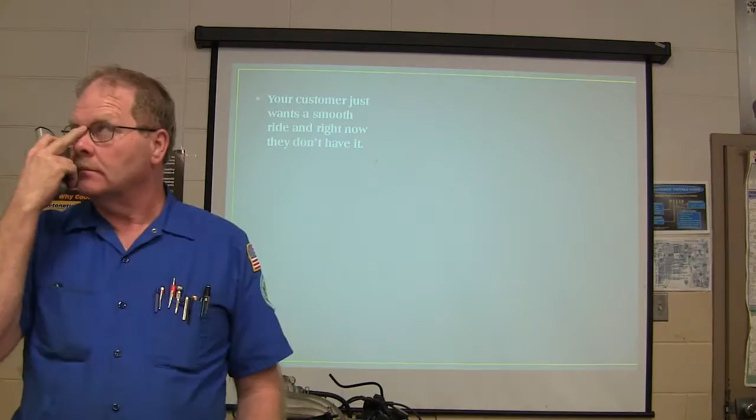So the customer wants a smooth ride, and right now they don't have it. Whenever we were working on the Buick, the president's car out there earlier, me and Reeves drove it up the road, and we hit about 60 miles an hour, and we were getting a little bit of that jiggling, feeling it in the seat of the car.

It had the tires balanced somewhere else, but anyway we put it up on the machine, and some of those tires had 2.5 ounces on them, or whatever. Sticky weights? One and three-quarter. Yeah, and what was crazy too, he also had originally set it up with a cone that looked like it would work right, but it didn't, and they were egging. So you had to make sure that whenever you're spinning that tire, you look at it.

Anyway, simple fact is, if you look under there, have you ever looked and seen wires going to the shocks and struts? And you wonder, what do I do with that? If there's some kind of a problem with that kind of thing, I even wonder how they work.

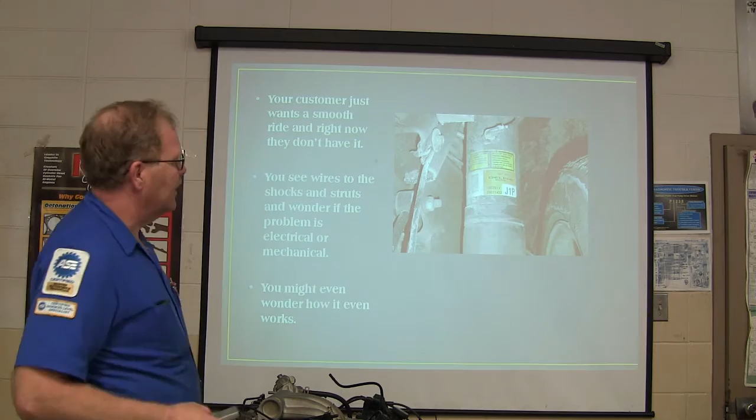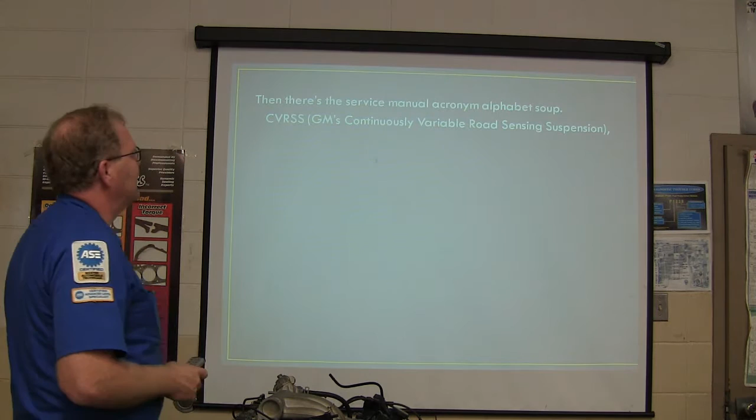Well, this is Delphi. Now Dave, the guy I was talking about earlier, he works for Delphi. He's one of their engineers, a guy I happen to have met in my doings and whatnot. The service manual has got that acronym alphabet soup - CVRSS, GM's continuously variable road sensing suspension.

Basically, you can see how simple that is, right? Fairly simple, you can just glance at that and figure out how it all works, not a problem. Is that them shocks you told us about, that somehow they put current to them and it makes the... Yeah, we talk about that a little bit later in this presentation. But they basically got some ferrous metal stuff in oil, and whenever you charge it up, it gets real tight and hard and turns into something stiff.

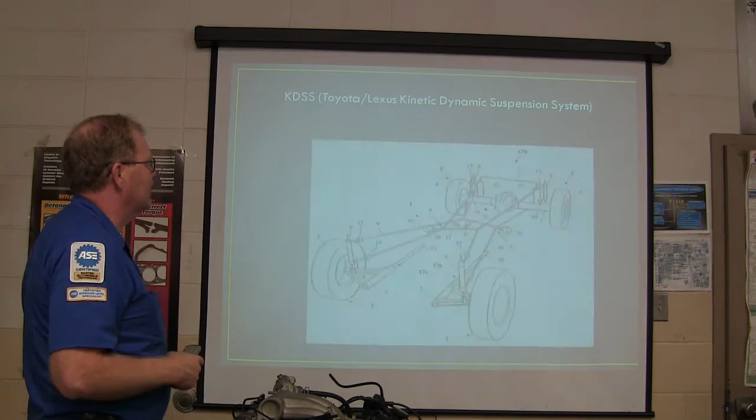It's pretty cool stuff. And then you got this KDSS, which is Toyota Lexus Kinetic Dynamic Suspension System - everybody's wanting to come up with that. There's sort of a rundown on that, if you want to look at all those numbers and everything, you can see what's going on there. It's a nice little tangled web we're in here.

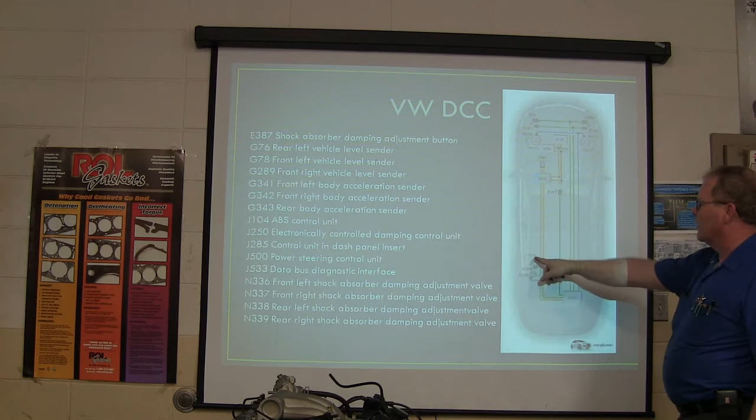Now you might notice on some of these German cars, each one of these components has got a code number like that. Whenever you see it on your schematic, it'll do that. You might notice over here, they got N338, G343, G76, and all of these things line up with one of those deals right there. So whenever you're troubleshooting something, if you don't know where to find this stuff, that's when you got issues.

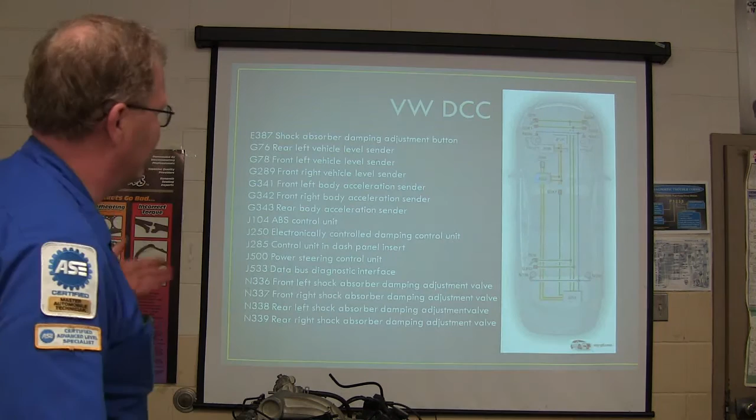See there your J533, N336 - if that was a clearer picture, you could see those numbers. That's what it's going to look like in the shop manual when you're looking at that. That's the peculiarity of that German stuff, they've got that way of doing that. BMW and Volkswagen are similar in a lot of the way that they do things.

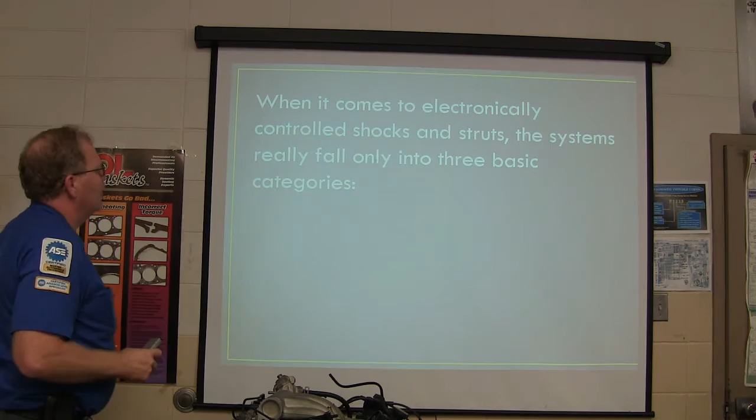But electronically controlled shocks and struts, the systems fall into three basic categories. You got manually selectable suspension, where you can change it yourself, and you've got your semi-adaptive suspension, and then you got your fully adaptive suspension. We'll try to touch on some of this stuff - you need to have some exposure to this stuff anyway.

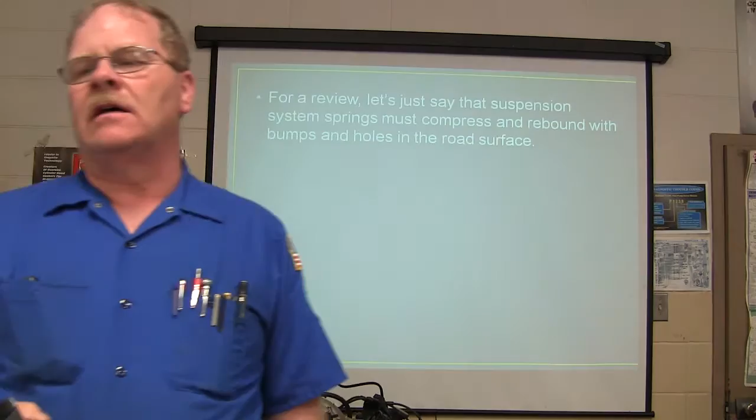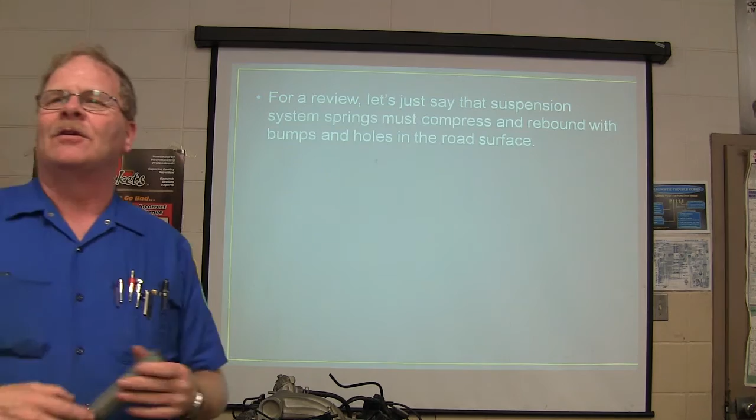Suspension system springs have to compress and rebound with bumps and holes in the road surface. Back when they had wagons, they just had axles under there, and every time you bounced over a bump, it would compress your back a little bit. It really hurt. So they'd either put rawhide under there to make that not so bad, or they'd put springs on the seats. That's the reason why they started doing that.

The softness or firmness of the spring is known as the spring rate.

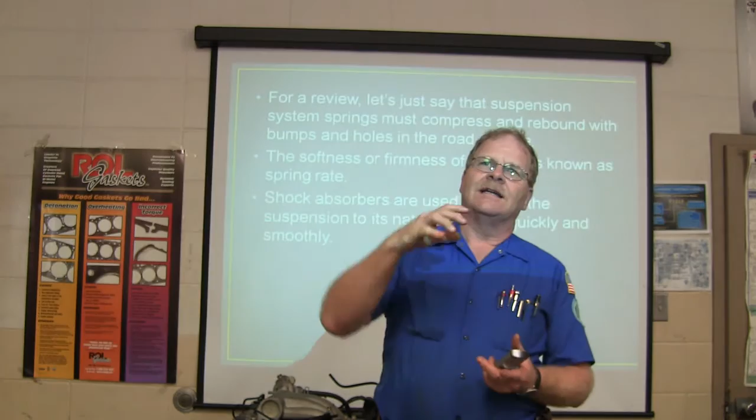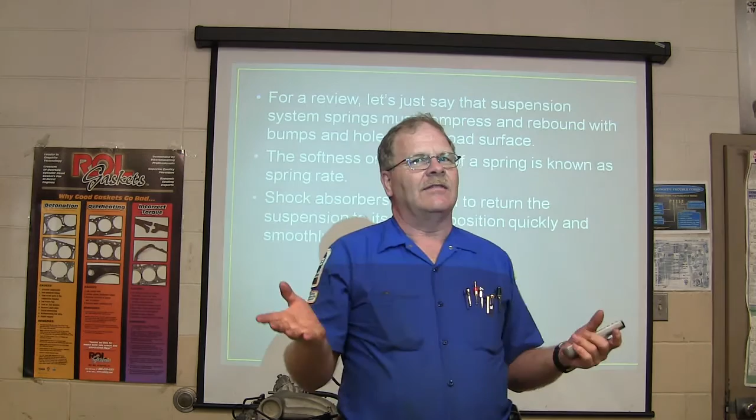My dad had a 66 Chevrolet pickup truck. It was a 3/4 ton, and the springs were set up under it. It had coil springs, not leaf springs, and half of the coil spring was wound really tight with the coils close together, and the other half was wound with the coils farther apart to try to give you the best of both worlds. It could carry a heavy load, but at the same time it rode fairly decent. So they had the same spring with two different spring rates on it.

But if you loaded it down, those were by default like overloads, because if it squished the spring all the way down so the coils were all touching one another, that was as far as the truck was gonna go.

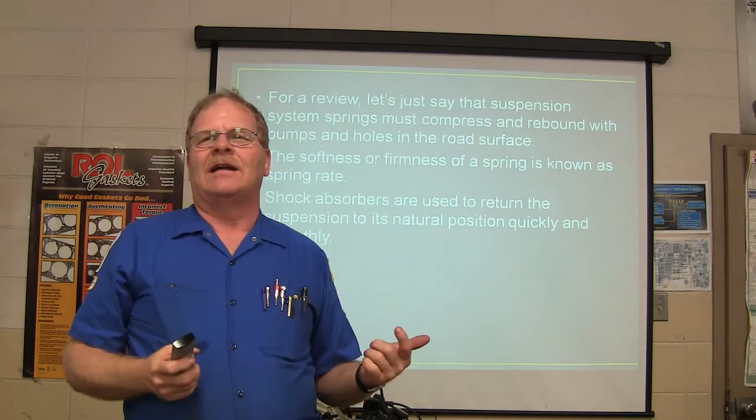I took it to the gravel pit one time and told them I wanted a yard of gravel put in it. It was a real long truck, and the guy says, there ain't no pickup will hold a yard of gravel. I said, well, put it in here until it runs over. And he put a yard of gravel in it, and I drove away with it.

He was really surprised. But anyway, shock absorbers return it to its natural position quickly and smoothly without bouncing.

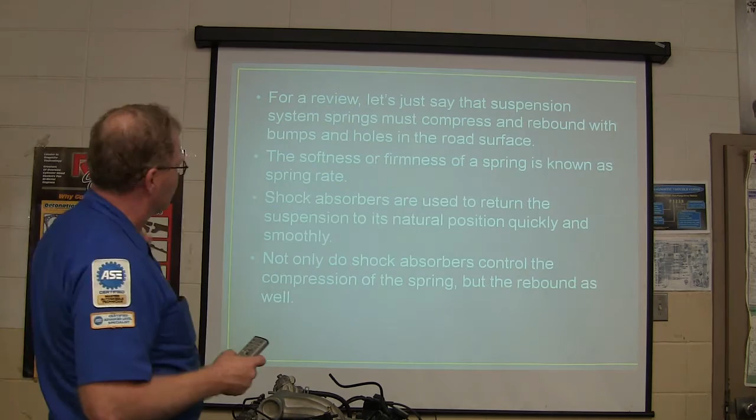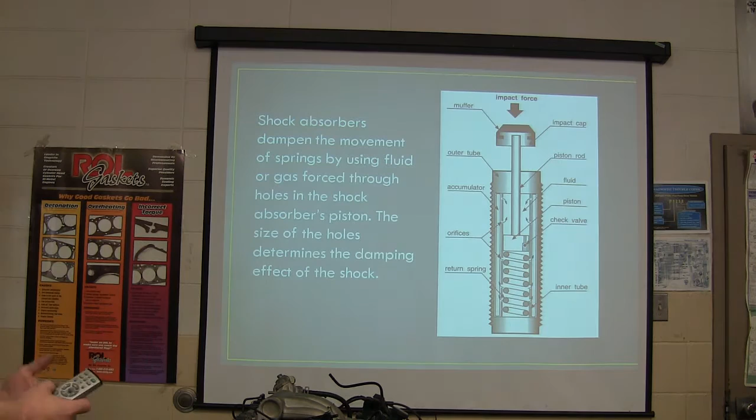Not only do shock absorbers control the compression of the spring, but they dampen the rebound too. They use fluid or gas forced through holes in the shock absorber's piston. The little holes here have these orifices, and you can see this thing bouncing in there.

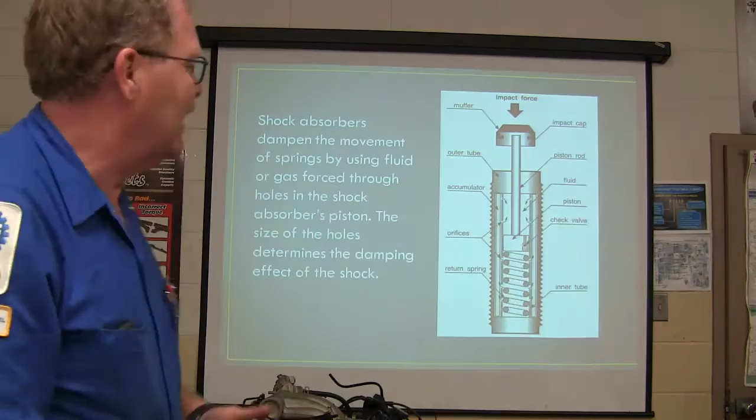Some of them are charged with nitrogen and that kind of stuff. How many of you guys have put shocks on that had that nylon thing on them, where you had to take that off and it would extend? That's irritating to have to deal with. Some of them don't have that. Some of them, when you take them out of the box, they're all the way compressed, and you put a wrench on the top and turn it like a quarter turn, and they come out. They don't all have that nylon stuff on them.

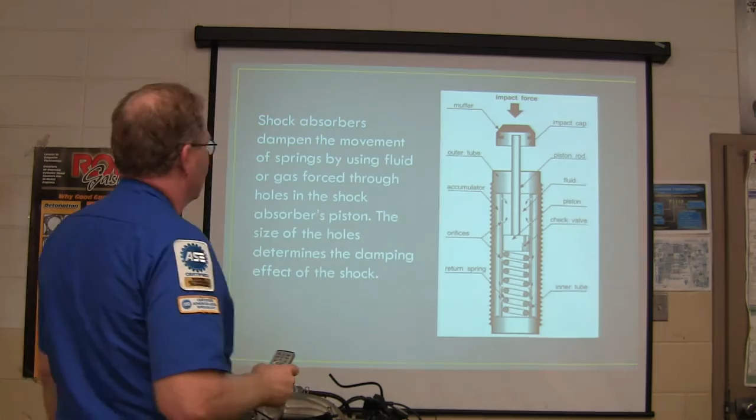The size of the holes determines the damping effect of the shock. If you change the size of the holes on the fly, you can change the firmness of it, right? That's probably what we're going into.

As a shock absorber compresses, the piston moves through the oil or hydraulic fluid, and the energy never goes away, it changes states. That's the first law of thermodynamics. The mechanical energy of the spring oscillations turns into heat energy, so they get good and hot.

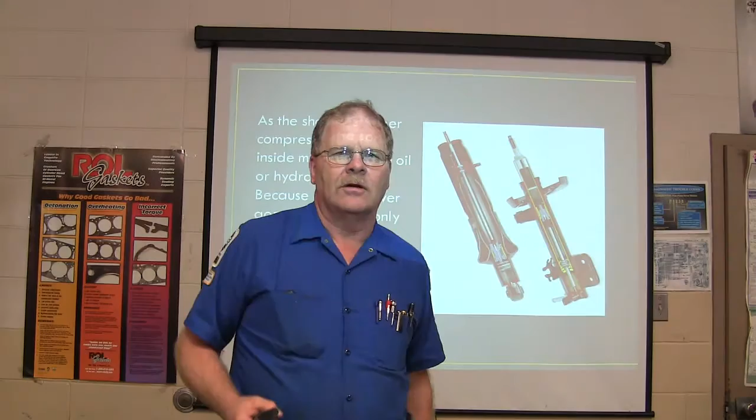Have you ever busted any shocks that were good shocks by going over something too hard? You did that? What'd you do to them? It doesn't surprise me. Drove through a ditch. I figured if anybody had done it, you had.

All right, the Rough Rider. Now listen to this, you might not ever know this. I looked for this and couldn't find it. But Dave was talking about something, apparently was out there earlier. There used to be an I-Suspend app for your iPhone.

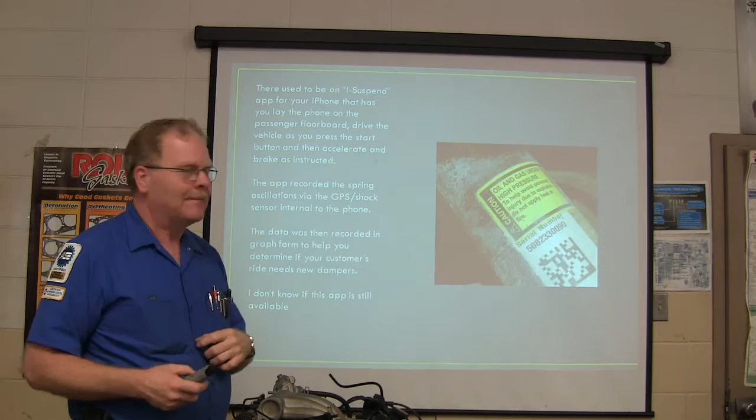You lay the phone on the passenger floorboard and drive the vehicle. As you press the start button and accelerate and brake as instructed, the app would record the spring oscillations via the GPS shock sensor internal to the phone.

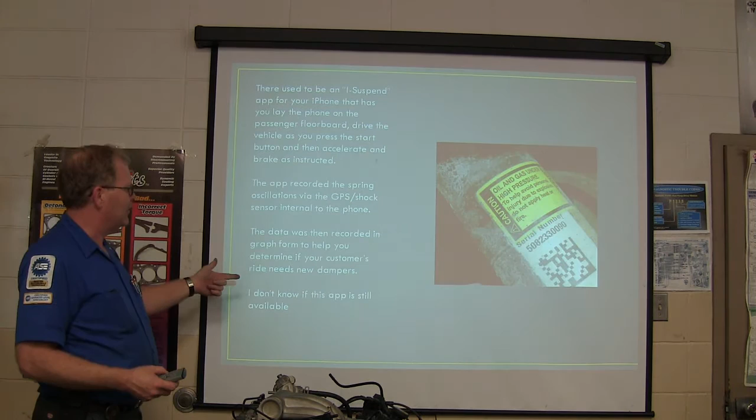The data was then recorded in a graph form to help determine if a customer's ride needed a new damper. In other words, it would make a graph about the shocks and how they were working. That's pretty cool. I went looking for that and couldn't find it, so if you can find it, great, more power to you.

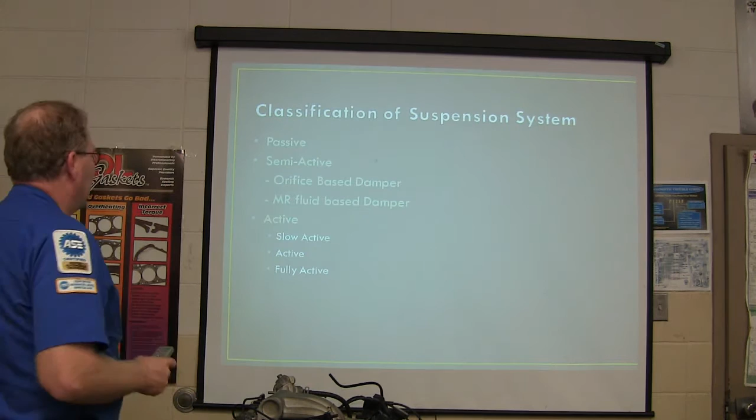I couldn't find it. All right, so passive, semi-active, and active suspension systems - that's what we're looking at next, the classification of suspension systems. You've got your passive, your semi-active with orifice-based damper or MR fluid-based damper, and then active, slow active, active, and fully active. There's a whole bunch of different nomenclature for that stuff, depends on how deep they want to go into it.

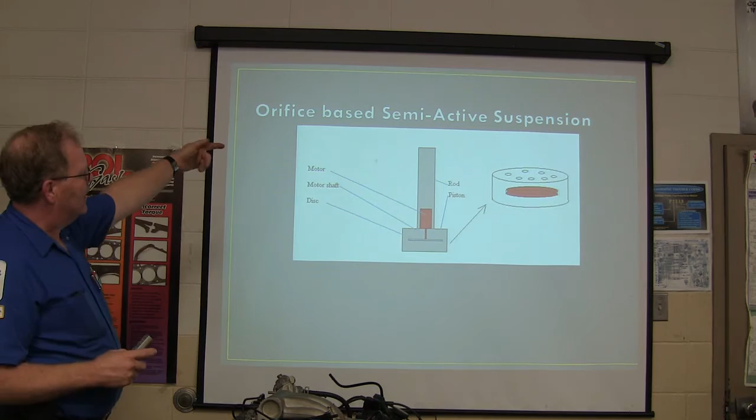Now your orifice-based semi-active suspension has a motor, a motor shaft, and a disc. This was drawn by somebody on paint, a public domain thing. Basically, when you turn that disc it changes the number of holes that are open, and that's how it changes the damping. That's basically like some of your old Continentals that had that kind of thing on there. On the very top it had a little flat deal with 4 wires going to it.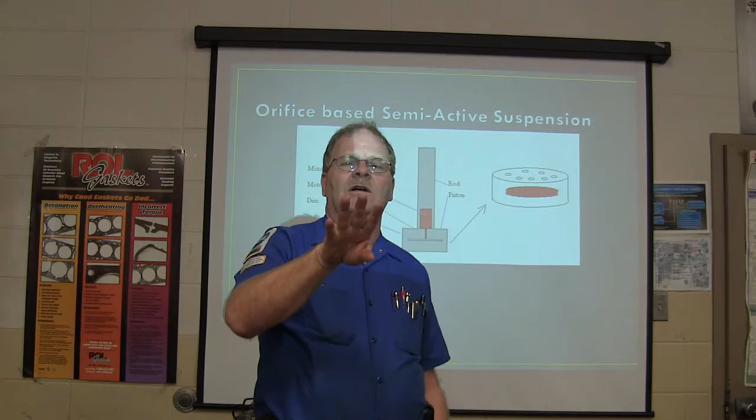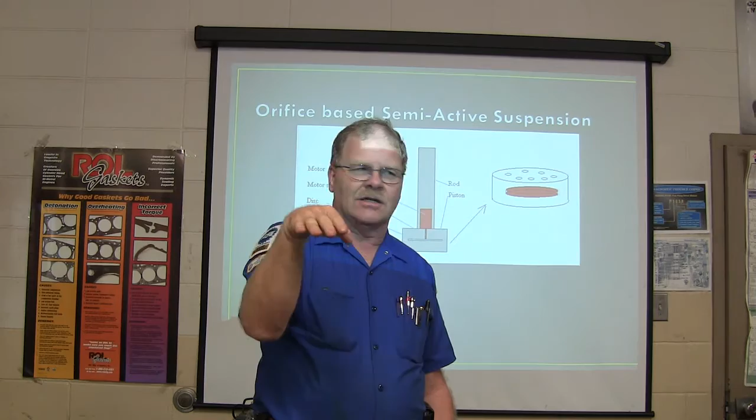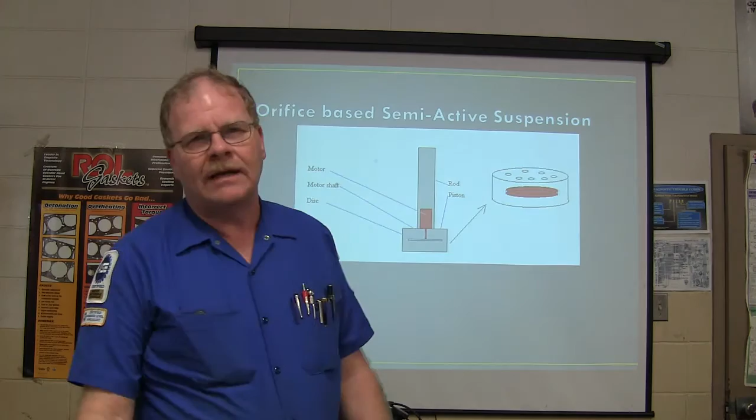2 of the wires, when you reverse polarity, would move it back and forth, hooked onto a little D-shaped shaft going down into the shock. It would only turn to 2 positions. There were 2 wires with a voltage coming in, and if it shorted that voltage away, it would know it was in one position. So basically you had a module looking to flip those back and forth. They went on with little Torx screws, and the ones in the back under the package tray on top of the shock towers were a pain to change. I did some of that stuff too, and that's another little picture of it.

Magnetorheological fluid is composed of oil and varying percentages of ferrous particles, 20 to 50 microns in diameter. What's a micron? Very small - you want an exact answer? Is it a millionth of an inch? It's a millionth of a meter, is what it is. It's like a thousandth of a millimeter, right?

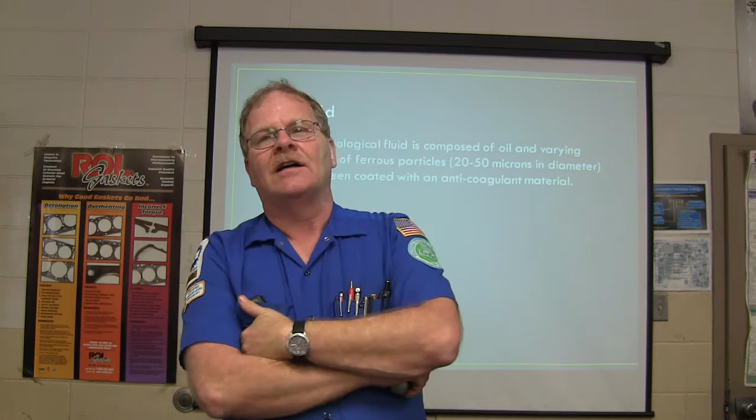So now, does everybody know what a micron is? When I ask at the end of the presentation what did you learn, are you going to be able to tell me that a micron is a millionth of a meter? Whenever you talk about a fuel filter, a 25 micron filter, they're basically measuring the gaps in the filter, which would be pretty fine, right? How do they measure that?

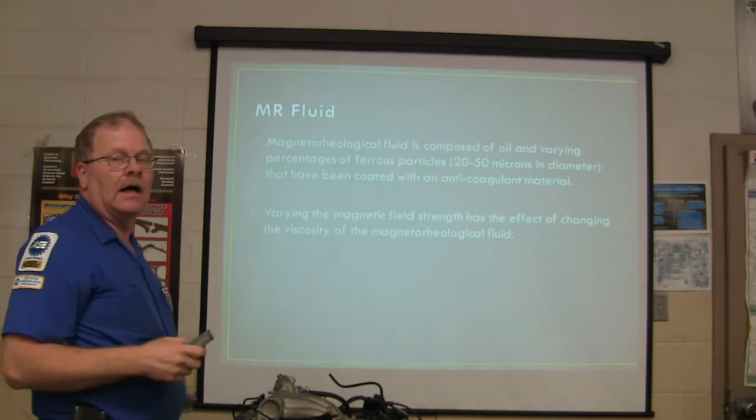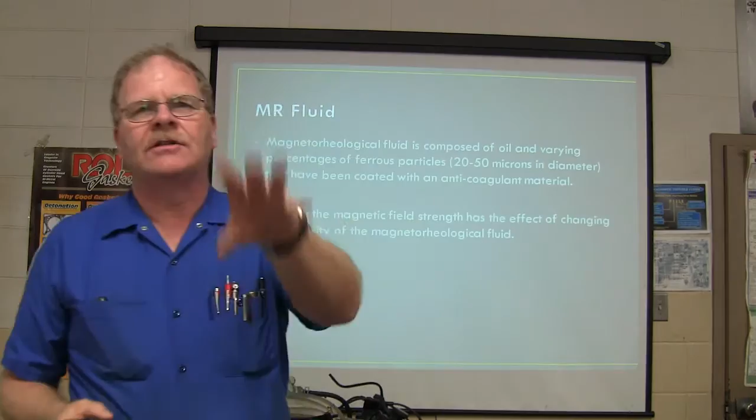How do they measure that? They've got little teeny tiny plastic balls that are that size, and they see how many will go through there and how fast. Each one, like a micron, is just a little sphere, looks like powder to you, but basically they determine how much will go through, and it's little enough to go through just about any kind of filter. As a matter of fact, steel, iron, rust is in such tiny particles that it will go through a fuel filter in some cases and stop up injectors. You've seen that happen before? Carburetors too, that little stuff.

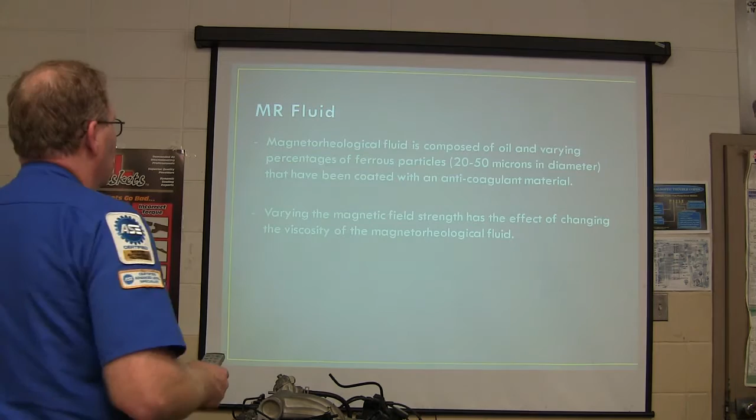So you vary the magnetic field strength and it has the effect of changing the viscosity of the fluid. You can see how that would work - it's not that complicated, right?

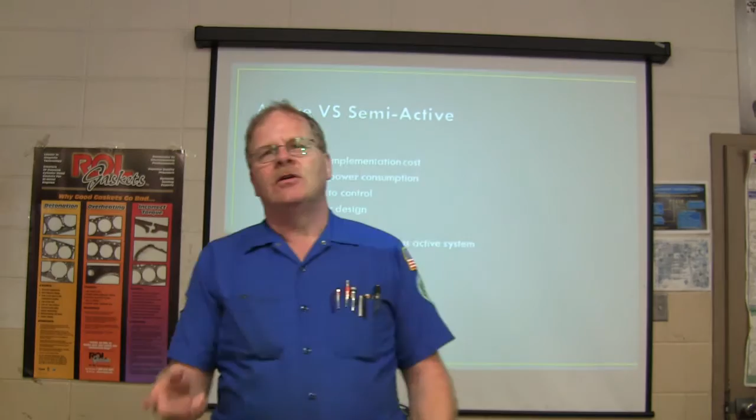All right, now then, active versus semi-active. You got lower implementation cost on semi-active, lower power consumption, doesn't take as much to keep it going, easier to control, simpler design, and it's easy to put on there if you're just going to put some on there. Can you imagine doing that? You put different shocks on there, they got little actuators on the shocks, you run your wires out there, and you can basically put some on there your own self.

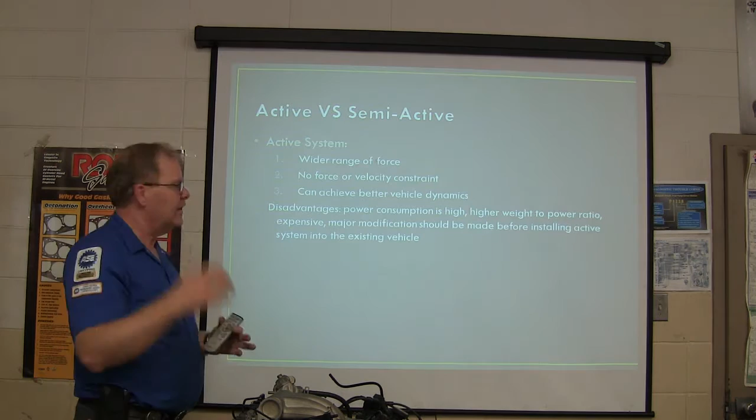All right, so active versus semi-active. The active system's got a wider range of force, that means it's got more that it can do. No force or velocity constraint. Can achieve better vehicle dynamics, and the disadvantages are it uses a lot of power, higher weight to power ratio, expensive. Major modification has to be done before you put an active system into the existing vehicle.

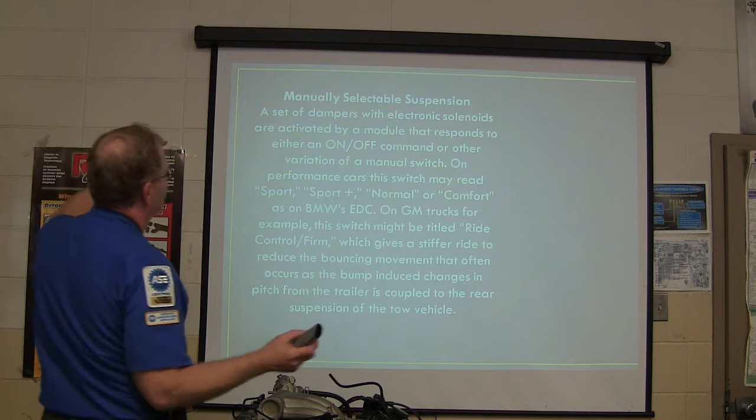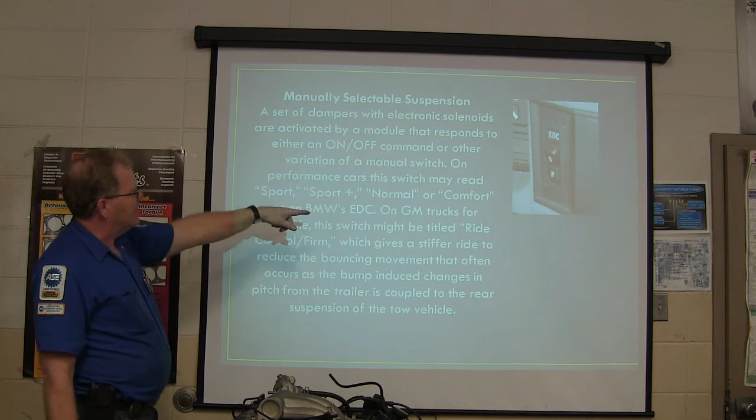And I never have been much of a mod person anyway. So you got manually selectable suspension. You got a set of dampers, electronic solenoids, that's like we were talking about earlier, responding to an on and off command. That's on your switch right there. BMW's EDC. On GM trucks, there's a switch that might be titled Ride Control Firm. Gives a stiffer ride to reduce the bouncing when you're pulling a trailer.

You ever drive a truck that had a really, really heavy load in the back, or a really heavy trailer behind it? And the headlights shine up in the trees, and it feels like the front tires are barely touching the road. You ever seen that? It just feels strange when you're driving something like that. You can turn the suspension up, it helps you with that kind of thing.

All right, so your major components of an electronically controlled semi-adaptive system are body position sensors, steering position, and body acceleration sensors.

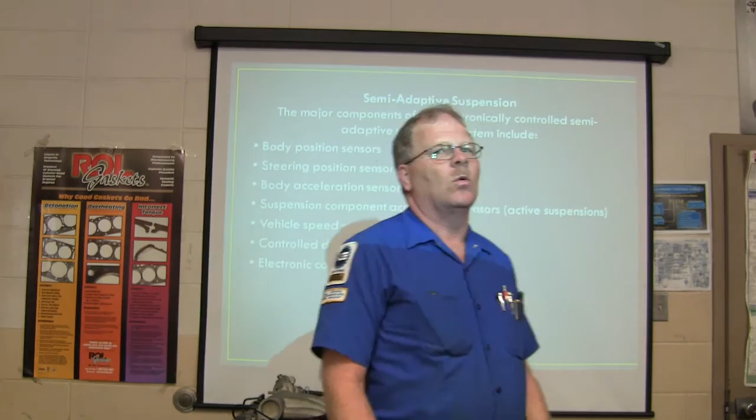What does a body acceleration sensor do? What does it need to know? What is it going to tell you? What's a body acceleration sensor telling you that nothing else will tell you? It tells you how fast you accelerate, tells you how fast you're stopping, tells you how fast you're going back and forth—pitch and yaw. Yaw is like this, and pitch is like that. So basically that's what you want to look at there.

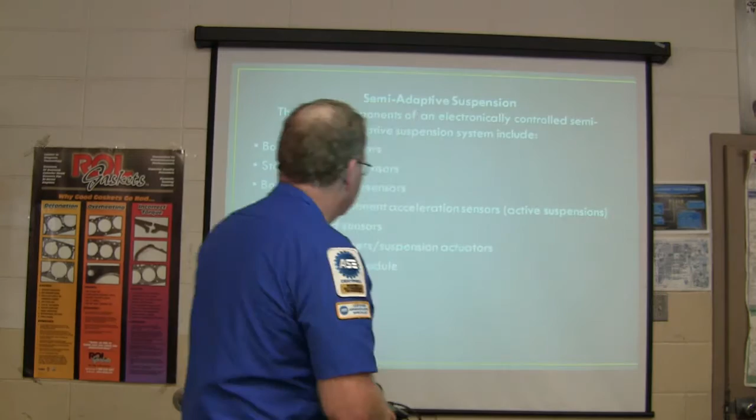Suspension component acceleration sensors, which is active suspension. Then you got vehicle speed sensors, controlled dampers or suspension actuators, and electronic control module. Obviously you got an electronic control module, you're always going to have one of those.

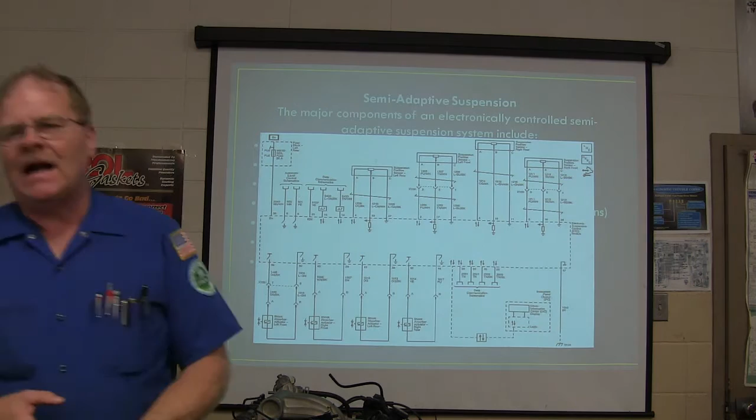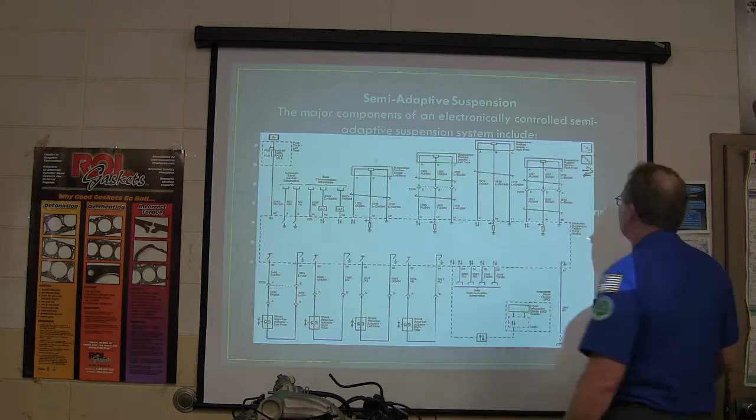All right, so you got semi-adaptive suspension. The major components are—and I think I need to back up one on that—body position sensors, steering position sensors, not a whole lot different there. Suspension component, pretty much the same, except the way that it acts. And there's your little GM schematic right there that you can look at. Anytime you see a GM schematic, you'll typically recognize it because it will have these two little boxes up at the top, like location and description and all.

All right, so road texture detection, direct and indirect body position sensors. One of the things it's basically looking at is how bumpy the road is, that kind of thing. So electronically controlled suspension systems have got to be able to detect the road surface in order to determine if the damper calibration needs to change. It's got feedback, and these computers gotta have feedback, they gotta be able to look at something and see how am I doing.

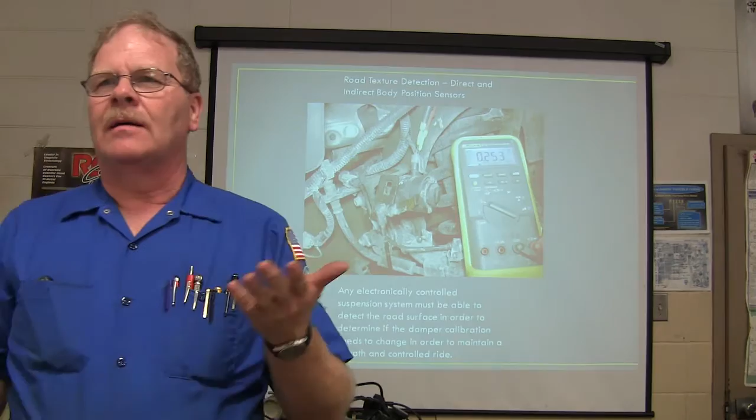Okay, so if this will pay attention to me. If it goes on—well, let me back up, I think I clicked it two times. Okay, yeah, okay, let me make sure I got it right.

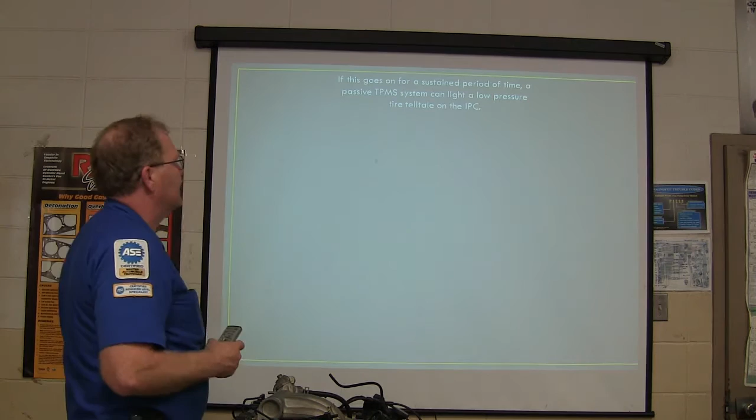If it goes on for a sustained period of time, a passive TPMS system can light a low pressure telltale on the instrument panel cluster. And you know, there's a height sensor right there, and all that, see?

All right, so let me come on. MagneRide has been around, introduced since the late 1990s, been around for a long time. But it's used in non-automotive vibration reducing applications like washing machines.

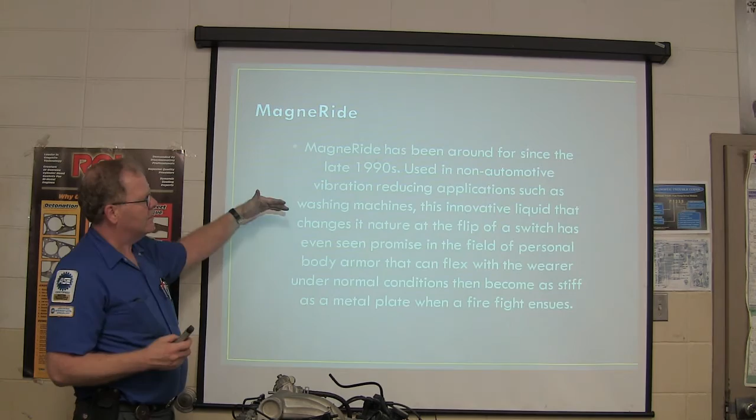Let me stop for just a second here. I mentioned this to somebody the other day. There was a guy, when I was pumping gas in 1974, I guess it was.

They pulled up at the gas pump one day. We had a full service gas station, and I went out there, and he was checking the air pressure in his tires. We had free air out there at the pump, like you used to have at gas stations. If I opened a gas station nowadays, it would be like a regular old-time gas station. I'd have full service, free air and water at the pumps, instead of having to thumb quarters in there to get air for your tire.

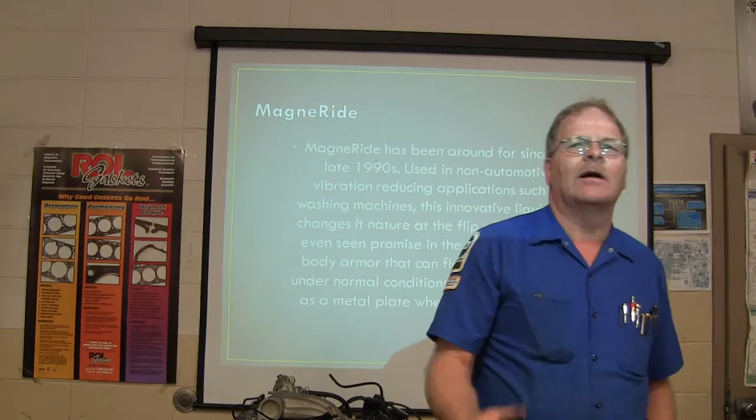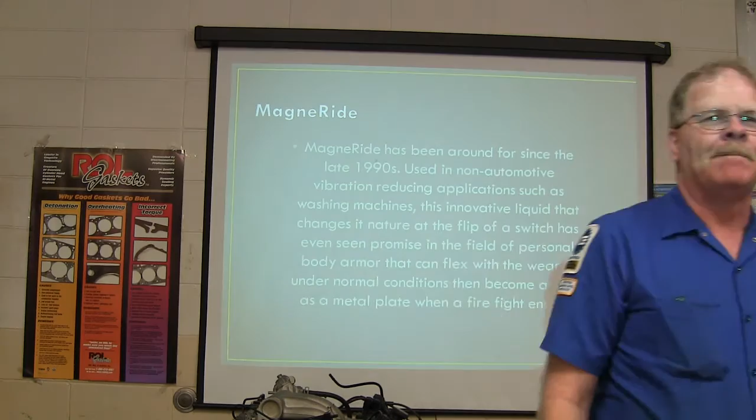This guy was checking his air pressure, and I said, what is that tube you got around the inside of your tire? He said, that balances my tires while I'm driving down the road. He made it out of water hose. The way those rims were made, there was a place where he could put those in there and they wouldn't come out - they were made big enough that he could just snap them in.

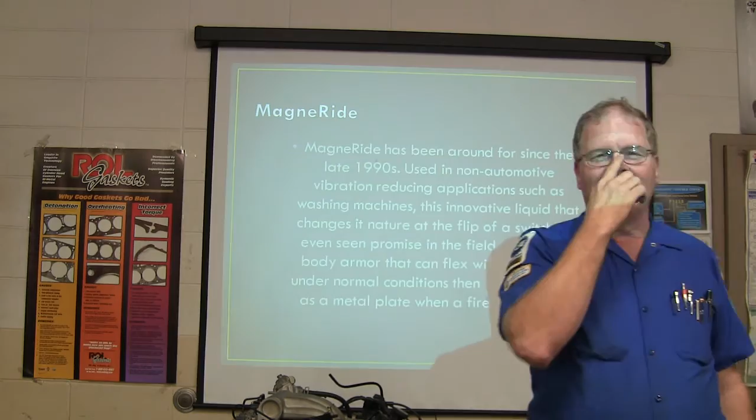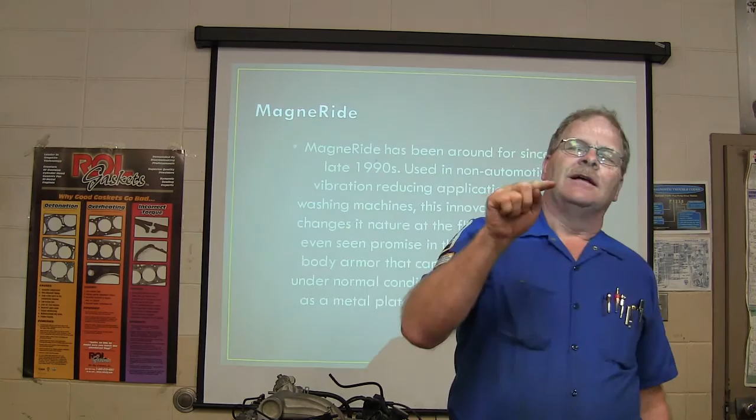I said, well, how do you make that? He said he gets that piece of hose, cuts it nice, and puts it together so it makes a hollow tube. He filled it up, as I remember - this was a very long time ago, in 1974, about 41 years back - about a third full of shot, like you put in a shotgun shell. And if the air pressure is right, when he's driving down the road, it automatically balances the tires as he drives.

He said the shot goes to the light side of the tire, just because of the dynamics of tire rotation. That seemed like a crazy thing to me, and I kind of filed that away for all these years. Then me and my wife, we got a Maytag Neptune washing machine.

That thing would spin clothes - you know these front load washing machines, how fast they spin. That doggone thing spins like a jet taking off, just screams up there. But it never, no matter how it was loaded, it never vibrated. You couldn't even feel it hardly when you put your hand on the machine.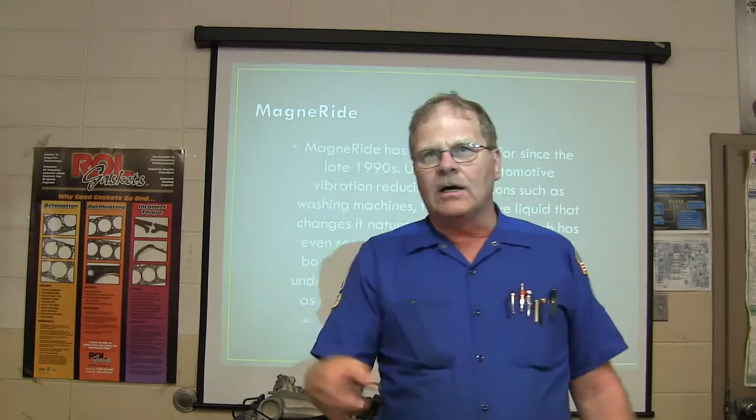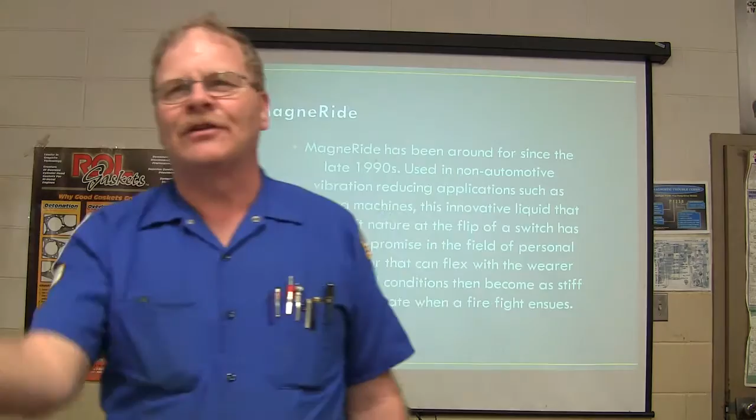I recognized as we were watching the video that came with it, that it had a tube on the back loaded with weights, just like that guy put in his tires. They said sometimes when you turn the drum, you may hear this stuff making racket - that doesn't mean there's a problem, that's what balances the drum. Interesting concept. I don't know where that guy learned that - he must have been some kind of engineer.

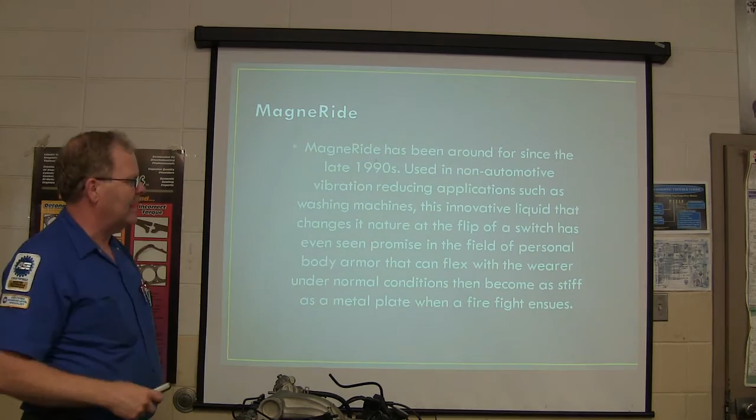It changes its nature at the flip of a switch. It's even seen promise in the field of personal body armor that can flex with the wearer under normal conditions and become as stiff as a metal plate when a firefight ensues. Like you're moving around, no problem - when you got a firefight, you just flip your switch and all of a sudden you got body armor you didn't have before. That's a pretty cool idea they came up with.

All right, so fully active suspension - if you're working on one of these, you need to make sure you fully understand the difference of these systems. How many times have I told you to go to description and operation when you're working on an unfamiliar system? Go to description and operation - you will find out things that'll save you a lot of time.

I've sometimes been dumb enough to try to fly in there and figure something out on the way, because the younger you are, the more you tend to fly in there and figure things out. Whenever we get some kind of piece of equipment at the house, my wife reads every word of the instruction manual.

Me, I want the quick start guide. Throw that book away, give me the big picture. I just want to plug it in and start using it, you know. But she knows stuff about this that I don't know. I just lost a button. Whose fault was that? All right.

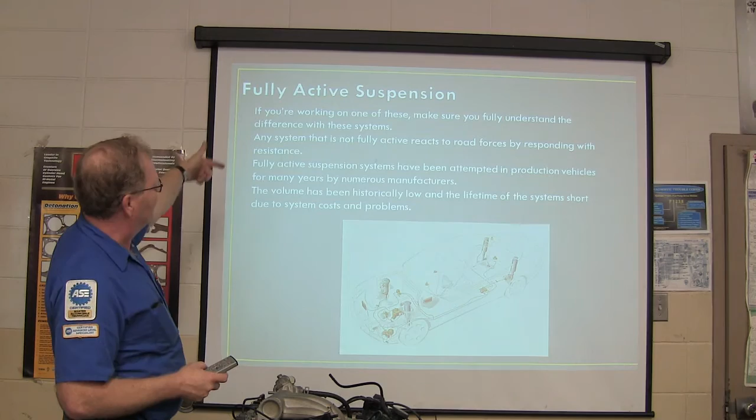Any system that's not fully active reacts to road forces by responding with resistance. Fully active suspension systems have been attempted in production vehicles for a long time, for years, by numerous manufacturers, and the volume's been low because they give trouble and people don't like it when they don't work right, because it's really kind of hard to make them work right.

So, let's get into some service issues here. Visual inspection is still in order. You're gonna see that same information at the end of this, so don't think I accidentally duplicated a slide, even if maybe I did. Visual inspection in order after a road test: corner bounce test.

If there's any signs of fluid leaks around the damper, physical damage—bent, worn, or broken—wire harness connectors, you may need to sell some dampers.

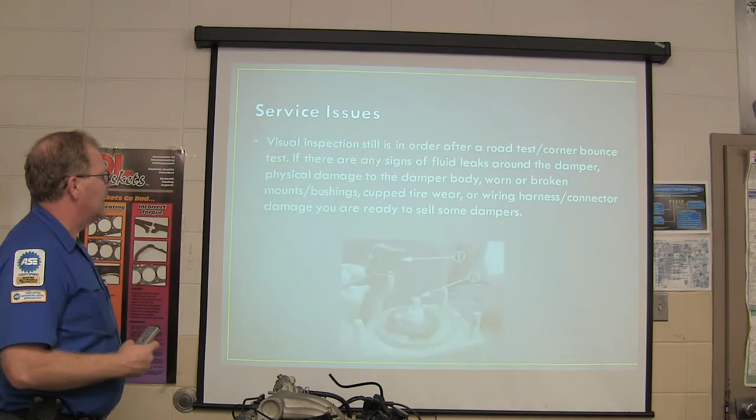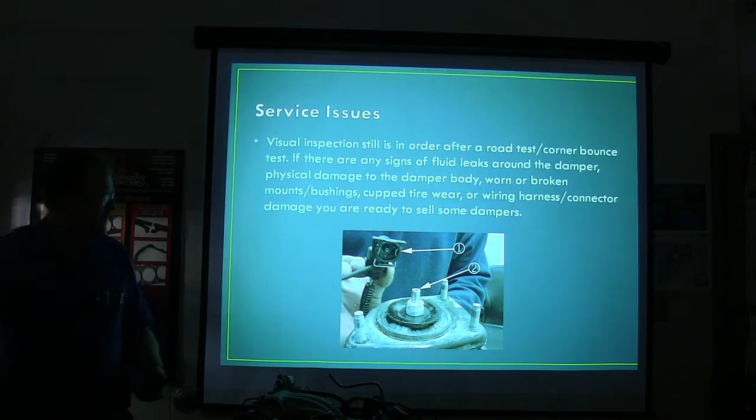Now that right there is your little changer—see that? This little thing turns, and that turns it, basically. Or that one there, excuse me, is one of the magnetic ones. That's not the turner, but it looks real similar to the other one I was talking about.

Body position sensors, miscellaneous connections—you got all these wires, you're gonna have weak links, you know? So they're basically potentiometers, like TPS sensors, operating in a harsh environment.

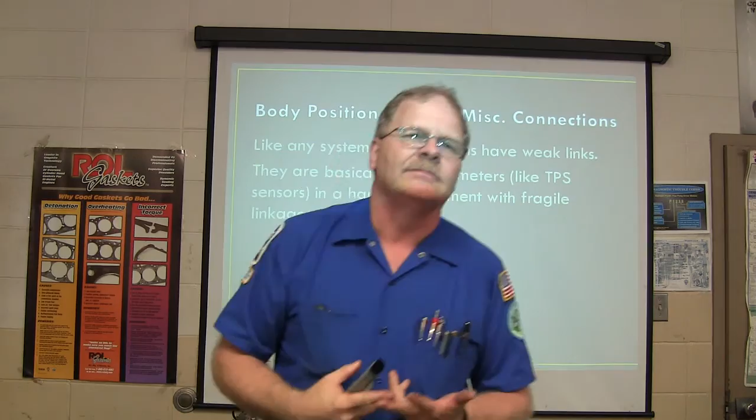My rule of thumb is the component that is in the most hostile environment and is working the hardest is usually the one that fails. Like in a gas gauge system, it's gonna be the one in the tank, because it's got all those temperature swings, going up and down all the time. Or anything that's out there bouncing around in the weather—usually if the horn doesn't work, it's because the horn's gone bad, because it's out there exposed to all that.

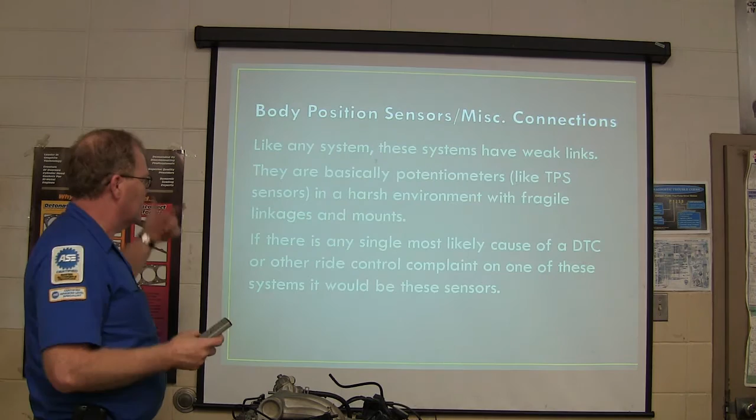So anyway, linkages and mounts—if there's any single most likely cause of a trouble code or other ride control complaint on one of these systems, it's gonna be these delicate sensors that put out this little whisper of a voltage and all that.

Communication with other systems—outside of the dampers having problems, broken body position sensors, you got module hardware and software issues, sometimes you'll do a reflash. Read the DTC, follow the chart, and always look at issues that pertain to the other systems.

Now, whenever I'm looking at a DTC and following a chart, I like to have a wiring schematic laying here, description and operation, read the DTC and follow the chart. If I read the chart through, I can tell what they're wanting me to do and figure out which way I need to head based on the function.

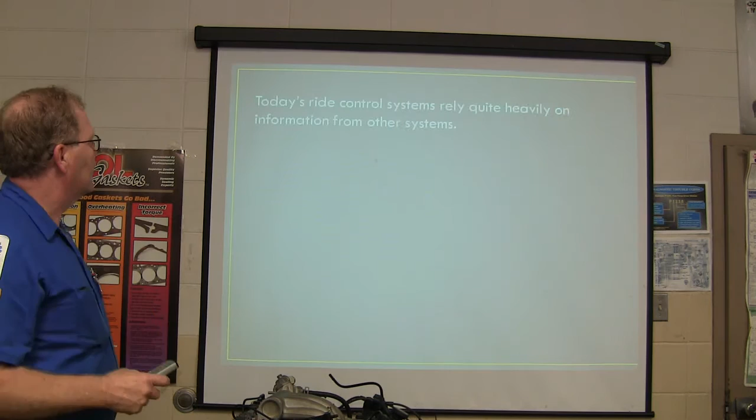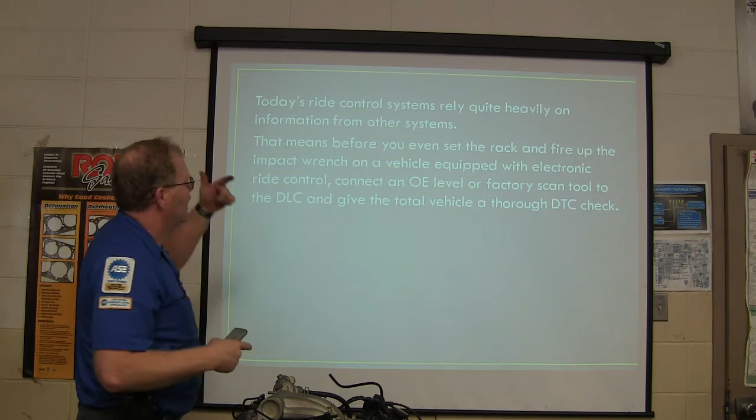And that's what you think—other systems have to provide information to the system. Before you set the rack and fire up your impact wrench on a vehicle with electronic ride control, connect an OE-level or factory scan tool to the DLC and give the total vehicle a thorough DTC check.

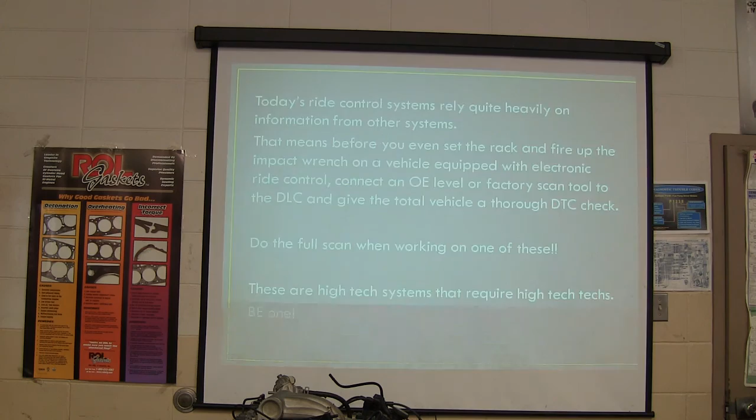All right, now when I click that, you got a BE one, that's what it says. And that's the end of that slideshow. All right, I'm gonna tell you guys about another...